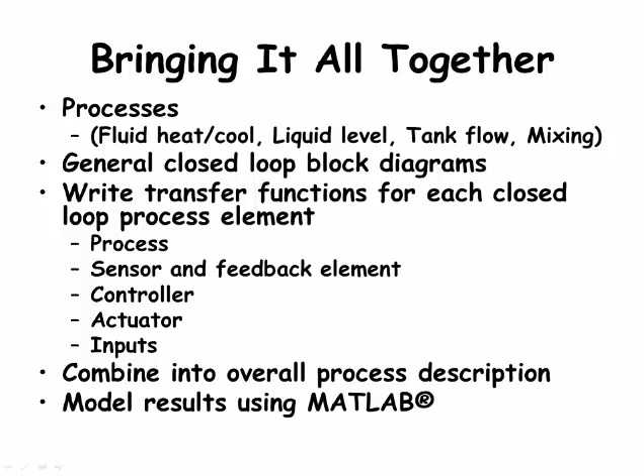With the information given, we will write the transfer functions for each element listed here and combine them into an overall transfer function in the Laplace domain. Then we will use MATLAB to find the inverse and the time-dependent response, which we can plot using MATLAB.

There are 7 steps to the process we will use. The first step is to write the transfer functions for each element in the closed-loop control system. For this course, we will use the equations and procedures we've developed and are in the course packet.

You have different transfer functions for the process, sensor and feedback element, controller, and actuator. Occasionally there is a new part of the process that requires some development, so we will go through a couple of examples. The second step is to draw a block diagram.

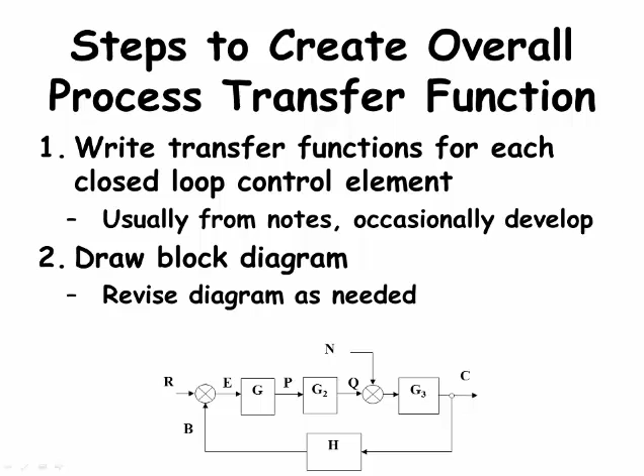The diagram should be complete and indicate if the control system is feedback only, feedback plus cascade, or feedback plus feed forward control. The third step is to develop the overall transfer function using the technique shown with the non-interacting tanks in series.

In many cases, we will develop the servo and regulator problems separately and then combine them together for the combined overall transfer function with a set point input function and an uncontrolled input function. In reality, you could have multiple uncontrolled input functions.

The fourth step is to define the input functions for the servo problem when the set point changes and for the regulator problem when an uncontrolled input changes. This information needs to be given in the problem statement.

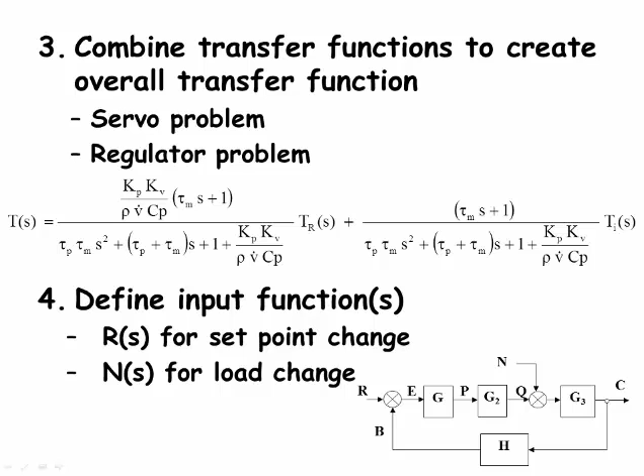There will also be other physical data that will need to be given to be able to find all of the element time constants. With the overall transfer function and other physical process data for each element, you will have a single overall transfer function in the Laplace domain.

We will use MATLAB to find the coefficients and roots necessary to find the partial fraction expansion. The sixth step will be to take the inverse and find the time domain expression. The seventh and final step will be to plot the time-dependent solution using MATLAB.

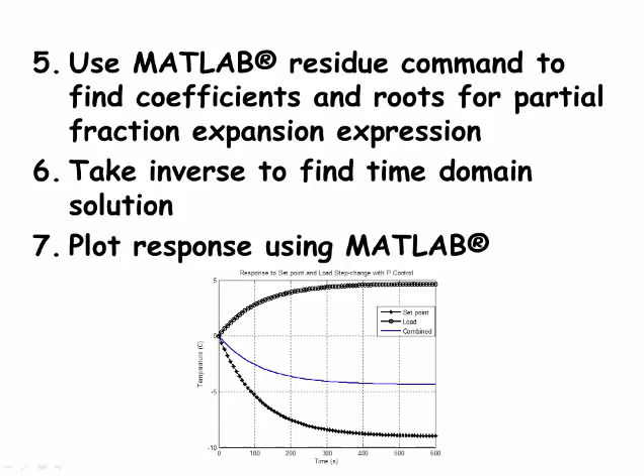Here is the fluid heater problem we've used throughout the course. We assume that the tank is well mixed and well insulated to simplify the problem. The uncontrolled input we will use for this example will be the temperature of the cold liquid.

We have a temperature sensor that is attached to a feedback element that supplies a measured temperature to the comparator. The error between the set point and the measured temperature is used by the controller to adjust an actuator that controls the amount of electric heat added to the cold fluid in the tank.

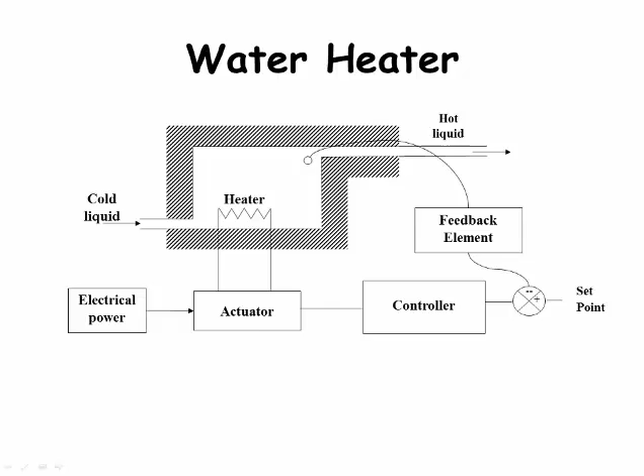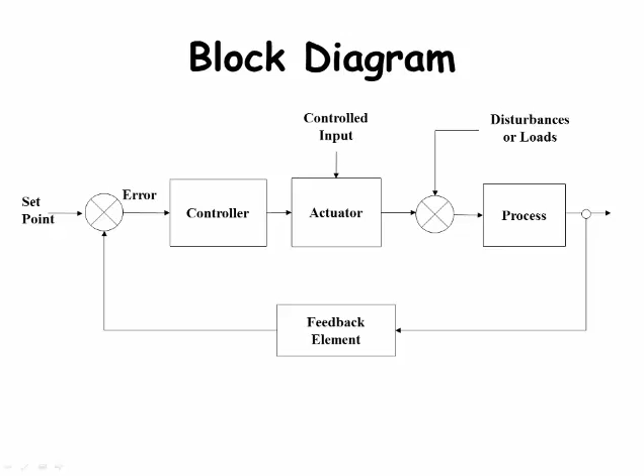Here is a generic block diagram. For this problem, we will assume that we are using feedback control only. We have a set point, comparator, controller, actuator, process, and sensor and feedback element. We write the block diagram in terms of transfer functions.

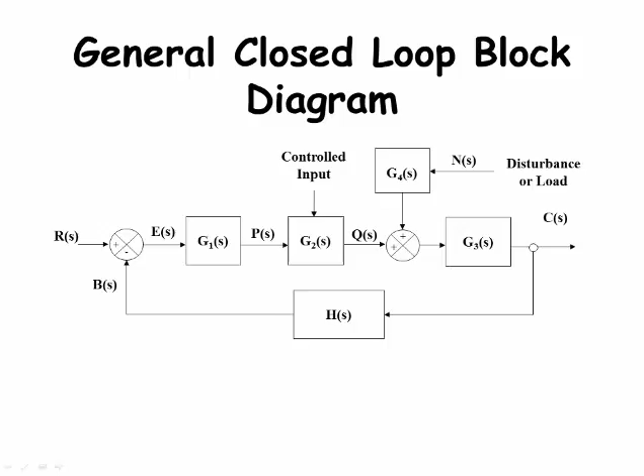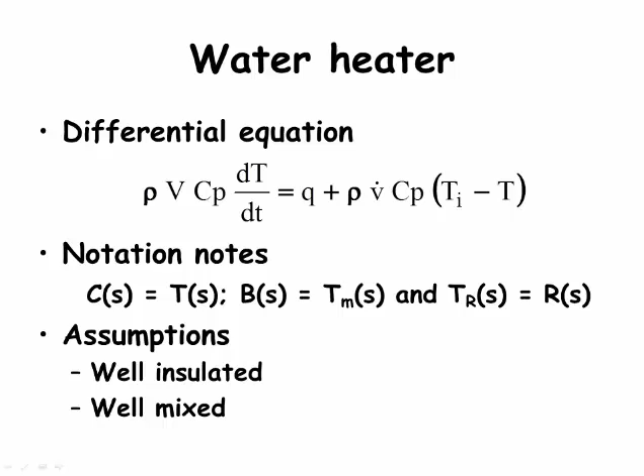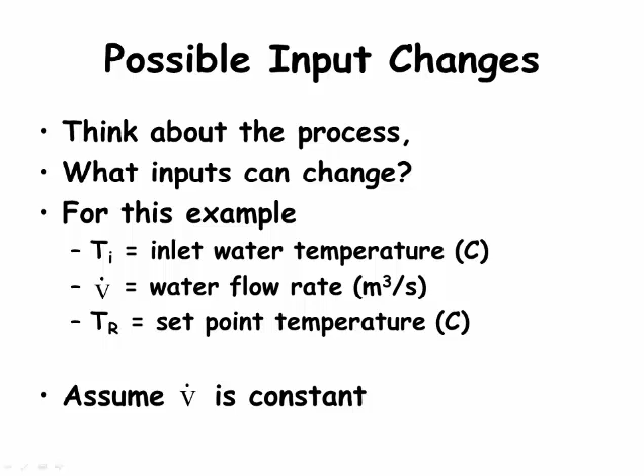We did this development back in Section 5 of the course packet. We wrote the differential equation and a steady state equation. We take the difference, then we introduce deviation variables so that we could use Laplace transforms.

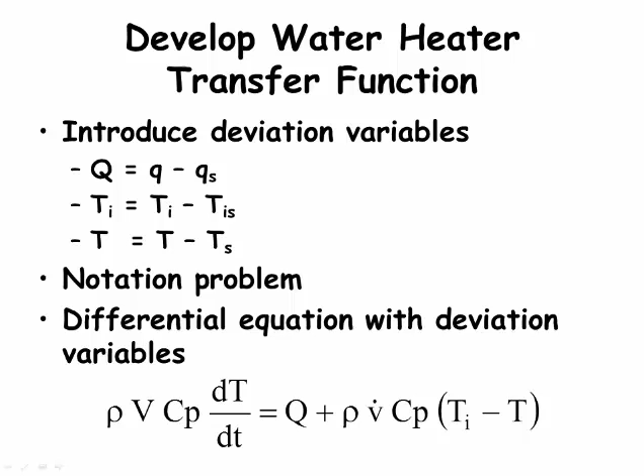Please note that there is a notation problem. The problem is that we are using capital T as the deviation variable, and it is also the outlet fluid temperature. We take the Laplace transform and define the time constant of the fluid heater.

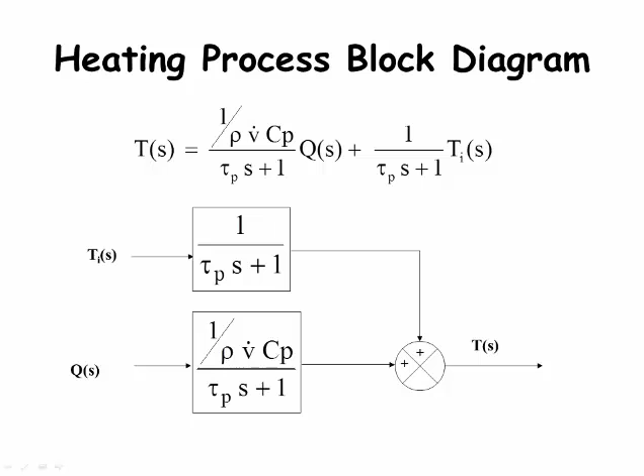Here is the preferred way to write the transfer function and draw the block diagram so that the process output T comes out of the general transfer function.

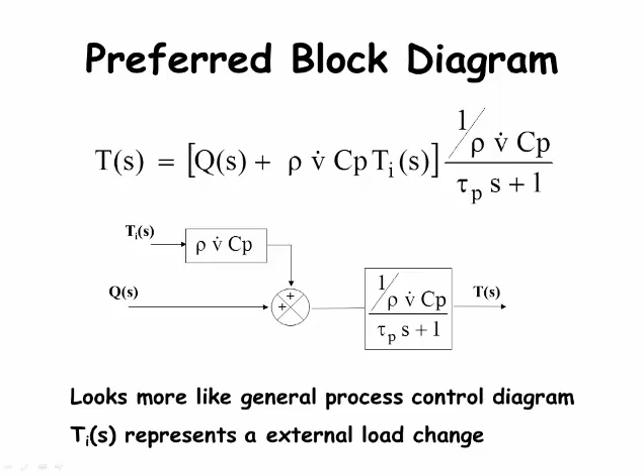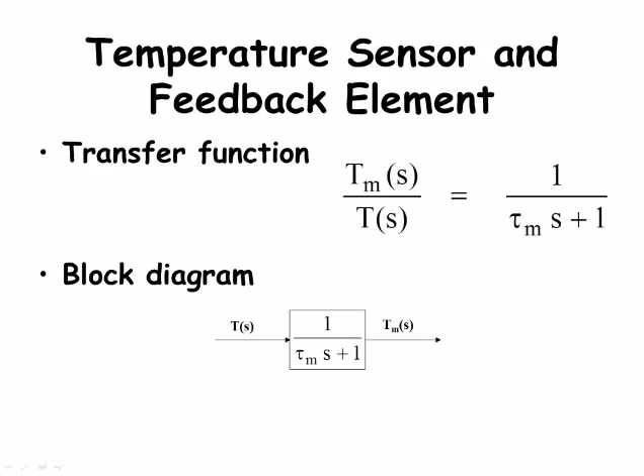Here is the temperature sensor and feedback element transfer function. The development was in section 8 of the course packet. Here also is the time constant for a temperature sensor based on a lumped heat capacity analysis. Here is the transfer function and block diagram for the temperature sensor and feedback element.

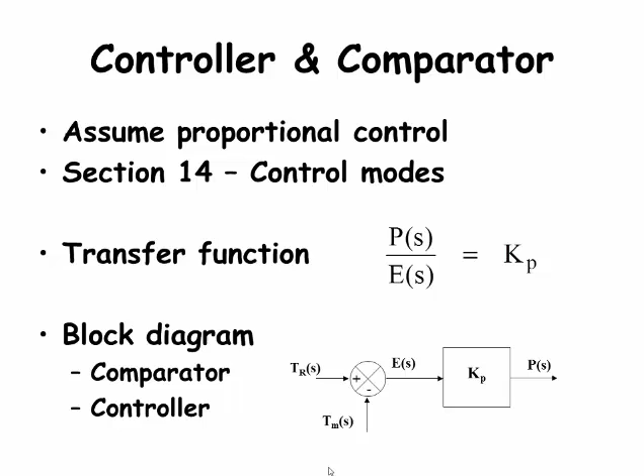As we have done before, we will assume that we will use proportional control only. We go to section 14 of the course packet and find the appropriate transfer function, P over E equals Kp, for proportional control. Also shown is the block diagram of the controller with the comparator and the set point Tr.

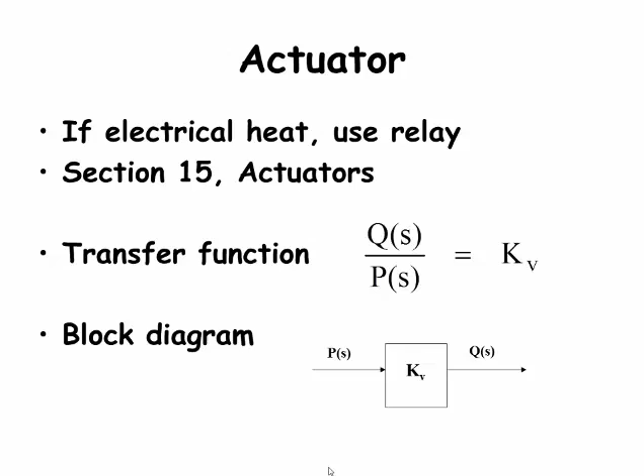Here is the transfer function block diagram for a relay. The gain is given by Kv. The relay is used to control the amount of electrical heat added to our fluid heater.

Again, let me repeat that you will not need to develop all of the transfer equations. You can just find the appropriate transfer function and put it in the correct place in your block diagram, as we did for the feedback element, controller, and actuator.

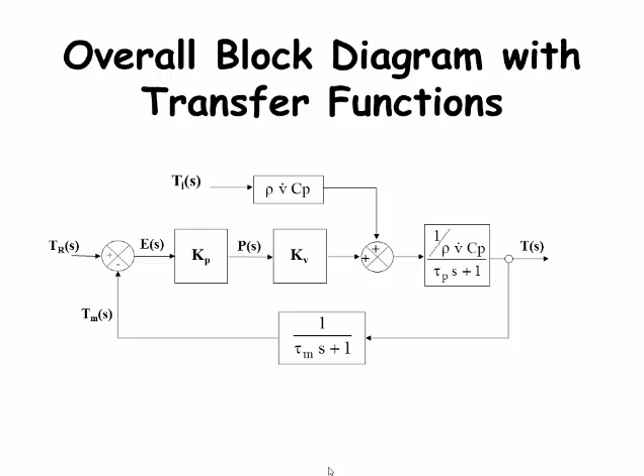This is the block diagram for feedback control only. If the problem had cascade or feed forward, there would be additional elements.

Now that we have the block diagram with all the transfer functions, we are ready to find the overall transfer function. Again, we will find the transfer functions for both the regulator and the servo problem, but we are going to do that in the next video.